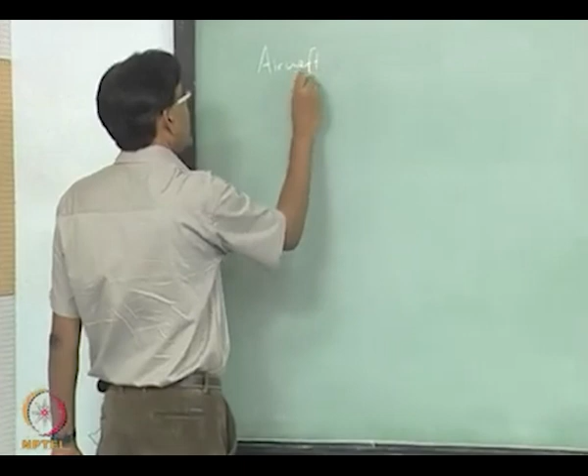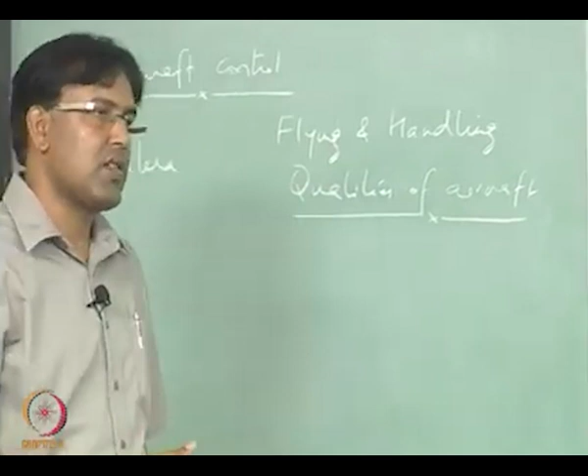Okay, if you remember in the last few classes we talked about flying and handling qualities of aircraft. And these qualities were based upon which class of aircraft, which category of flight, and the levels, and all of them were related to where the eigenvalues of the aircraft dynamic modes are located in the complex plane.

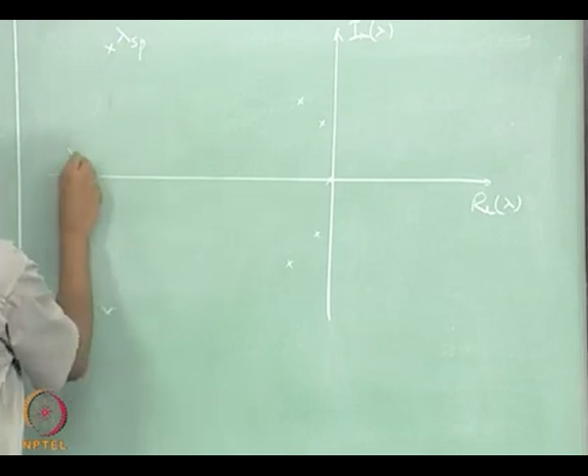So, this is how typically we saw the eigenvalues of aircraft located in the complex plane, right. So, clearly the real eigenvalues are giving the time constants, and the complex conjugate eigenvalues are giving us the damping

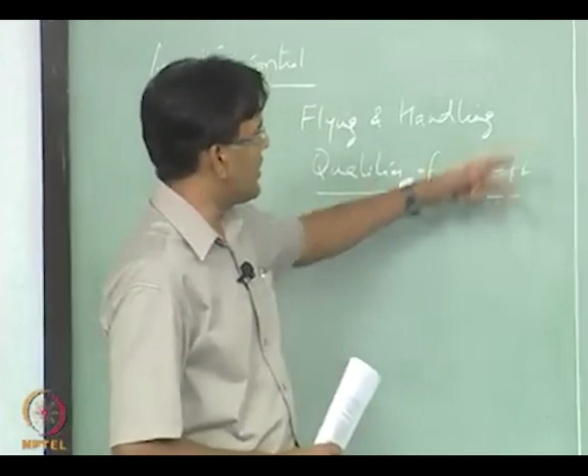and the frequency characteristics. Now, the question is let us say our basic aircraft design results in giving us in one of the flying conditions, not all, but let us say it results in giving us the eigenvalues at these places located in the complex plane, right.

And let us also assume that these are not what is required according to the flying and handling qualities. So, remember we said that flying and handling qualities will depend upon these parameters associated with the location of the eigenvalues of the aircraft in the complex plane.

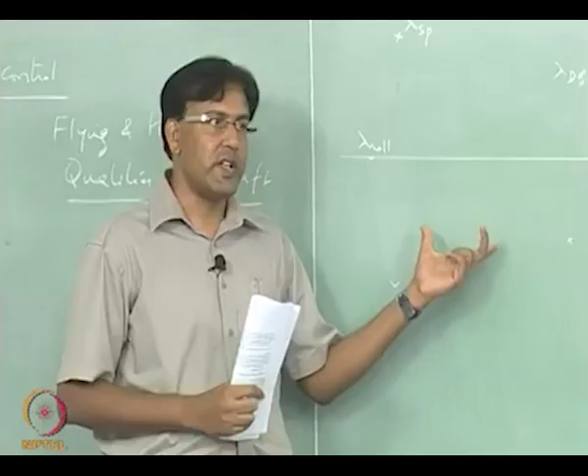So, if there is no matching of what is required and what we have achieved by the design, then either we can find out the aircraft design parameter which can be changed so that we get the location of the eigenvalues in the complex plane as required by the flying and handling qualities, or we do something else, and that something else is related to the subject of aircraft control.

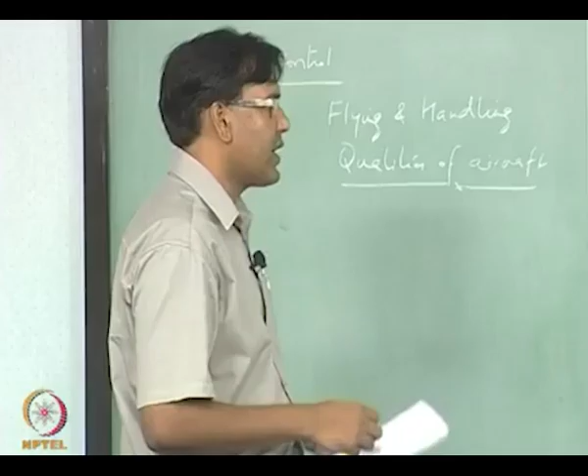So, what we are looking for is we are looking for artificially changing the dynamic response of aircraft small perturbation motion, and also when we are trying to execute maneuvers, there also we want the aircraft to follow certain desired dynamic behavior, which can be achieved by the aircraft control systems.

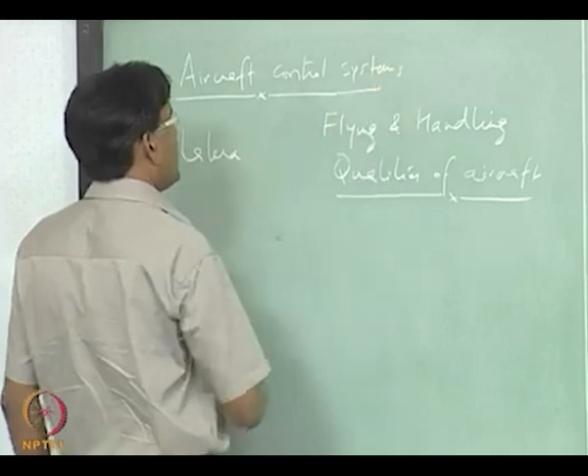Typically, the task of aircraft control system will fall in three different categories.

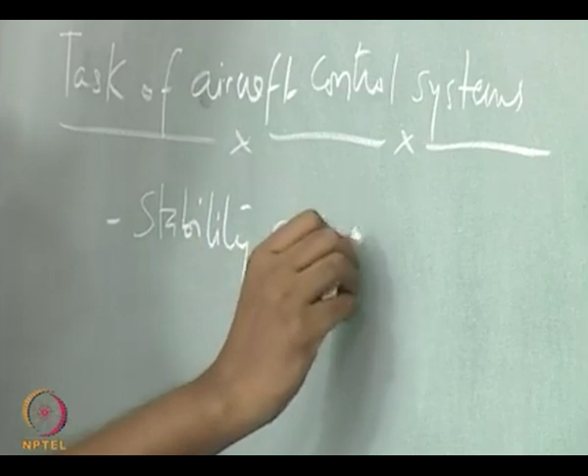One is stability augmentation. So, control system which results in providing artificial stability to the aircraft are known as stability augmentation systems, and in short form it is also written as SAS.

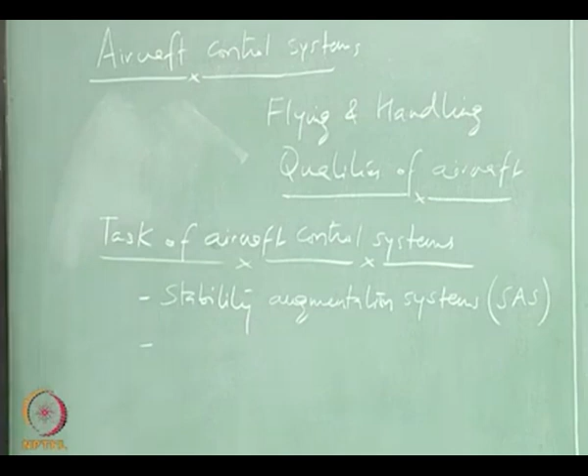The other type of control task is to augment the control system itself, and those control systems are called control augmentation systems.

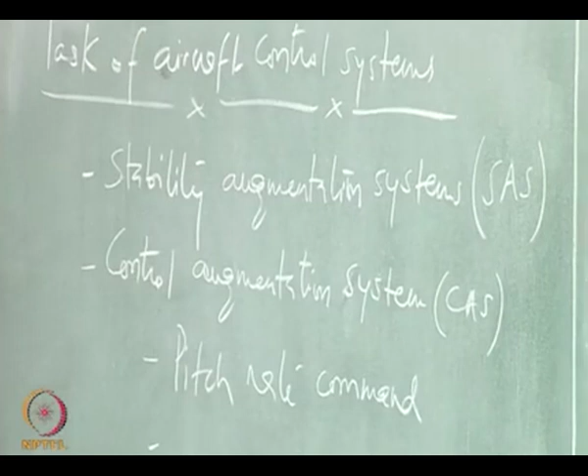So, task of this control system can be, for example, commanding the pitch rate or commanding the, for example, the acceleration.

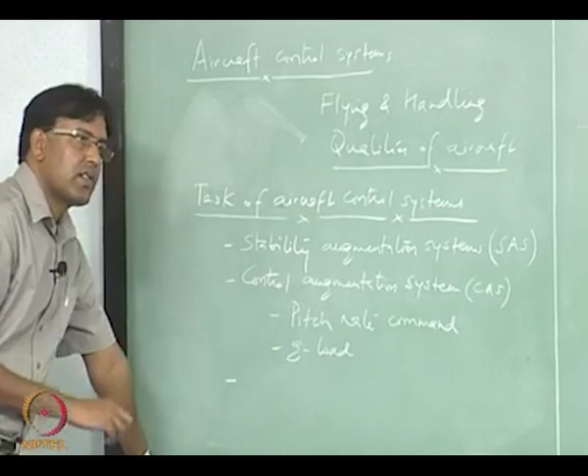There are other class of control systems which are designed for pilot free flight, wherein pilot does not have to do any work, he just fixes some number or attitude of the aircraft and he can leave his hands off the control surface as a sticks, and automatic control systems take care of the desired dynamic behavior of aircraft. So, in this category we have control systems.

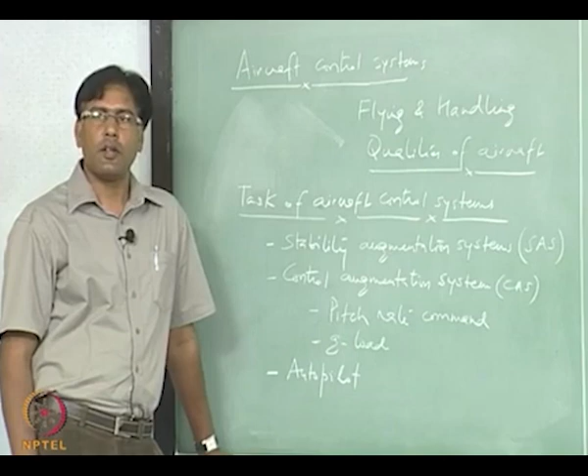Autopilot control systems are those control systems where pilot can fix the desired attitude and the path for the aircraft and leaves his hands off, and the control system takes care of the aircraft.

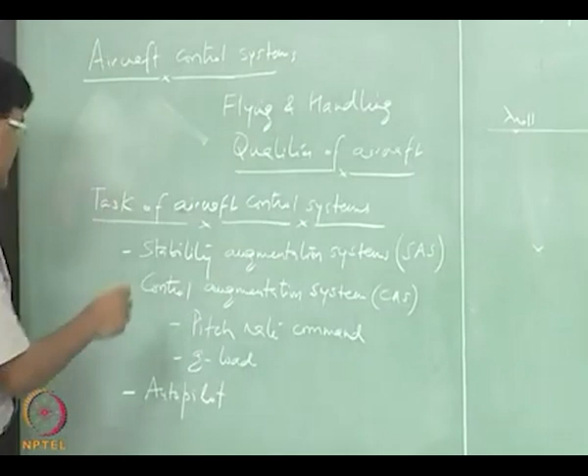So, in this class we will first look at the stability augmentation system.

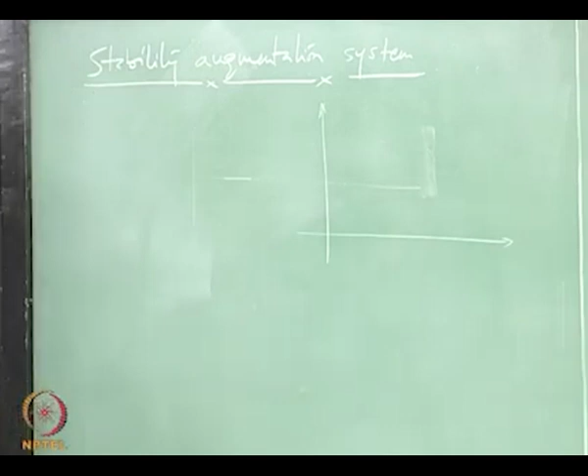So, as the name suggests, this particular type of control systems is for augmenting the stability of aircraft. So, what essentially it does is it helps in locating the eigenvalues suitably using a feedback mechanism.

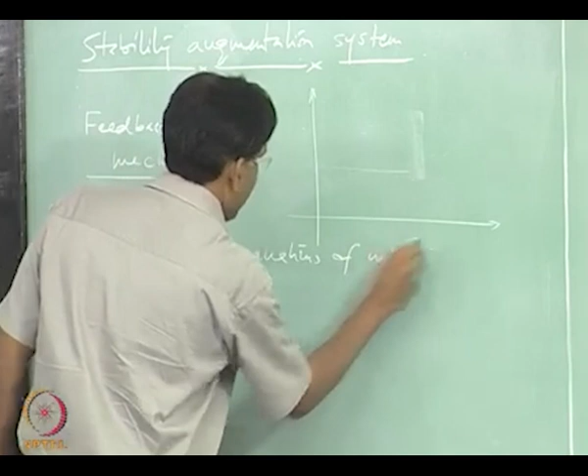So, let us go back to our equations of motion, where we had the complete aircraft equations of motion written in compact form as

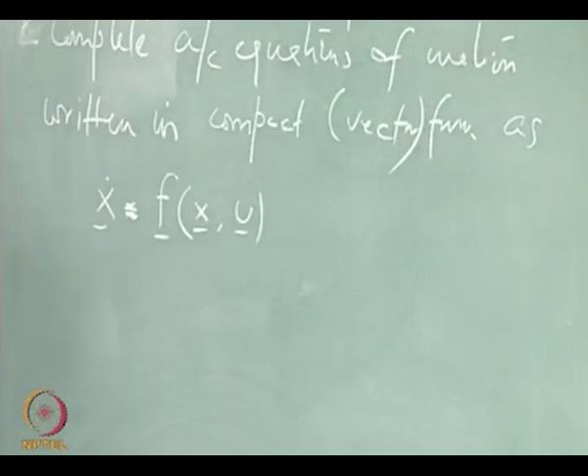linear control systems are actually designed around particular equilibrium flying conditions, and those flying conditions are obtained by setting this derivative of the aircraft state variables to 0. And so, we have equilibrium conditions which are denoted by x star, u star. The linear model around the equilibrium point is developed using small perturbation theory, and what it gives is

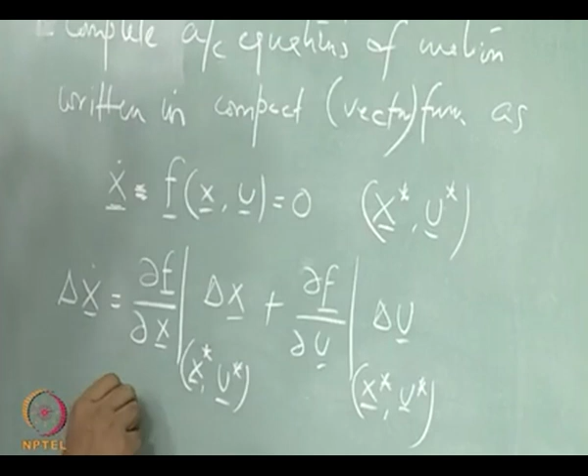now, this matrix is a matrix of constant numbers at this equilibrium flying condition, and that we called as system matrix A, and this matrix is also evaluated at this equilibrium point and is called the control matrix. So, A is system matrix and B is control matrix. So, we have our linear aircraft models around equilibrium point.

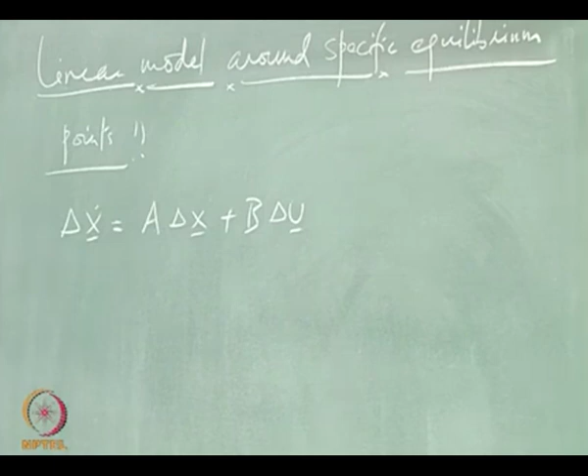Aircraft response in perturbed variables are governed by the eigenvalues of the matrix A, which we obtain by solving this equation of characteristics, and these eigenvalues are located in some fashion in the complex plane.

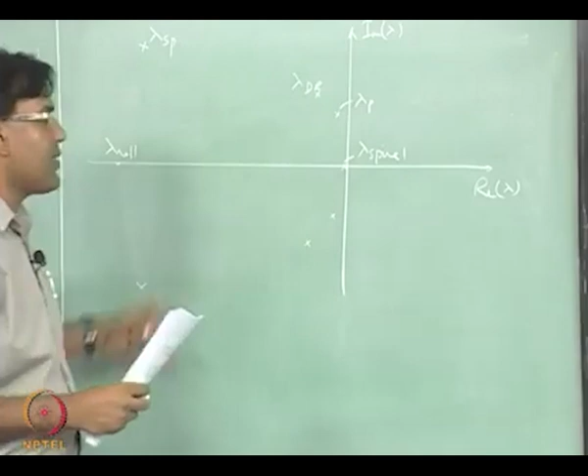What we essentially want is, we want to move these eigenvalues in the complex plane, so that we can finally achieve what is desired for the aircraft by the flying and handling qualities in terms of time constant or the damping ratio and frequency characteristics. And that of course has to be done through this delta u.

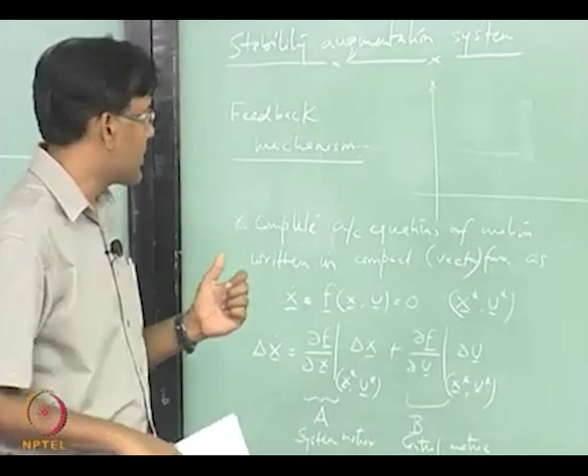So, there is one case when this delta u is 0. So, aircraft is at some equilibrium condition, is flying, and whenever small disturbance is hitting the aircraft it is showing some response, okay, and that can be stable yet not so desired. So, zeta and omega n, for example, may not be what we want.

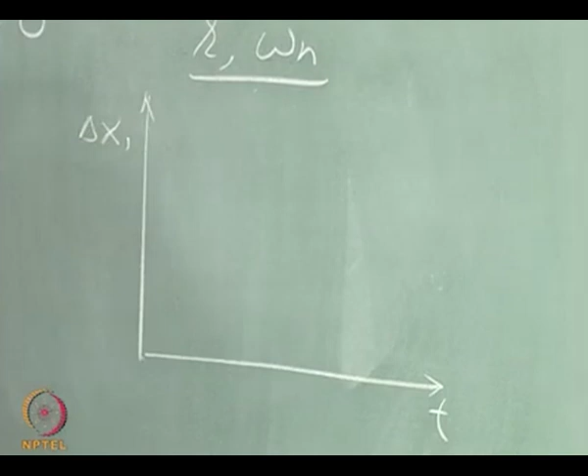So, one of the responses, let us say in some variable x1 or the perturbed variable, is looking something like this. This is the natural response. What we are intending to do through the stability augmentation system is to modify this response.

As desired. There are many ways of doing that. Linear control theory or classical control theory is full of techniques which help you to define this delta u in some fashion, as for example this.

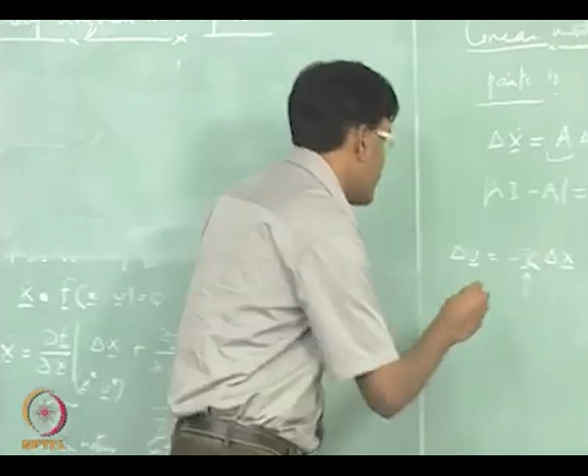So, here this delta u is modified according to the change in state variables, perturbed variable, using this constant k. This k is called gain, and it can be a matrix, because we want to control response of aircraft in different variables. So this matrix k is not just one gain, but a matrix of gains, or a vector of gains.

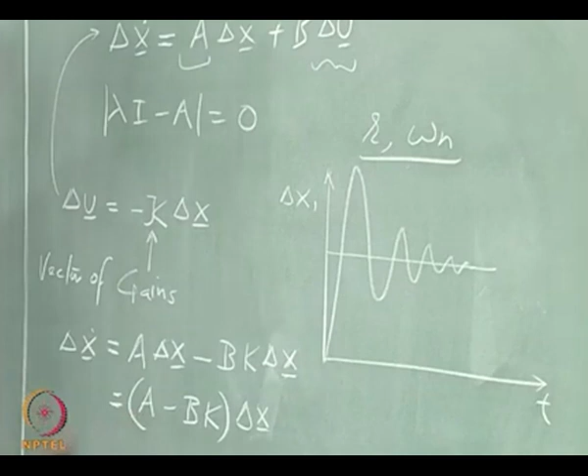Let us see what it does to this linear model. When we incorporate this delta u in the linear model, it changes the system matrix through the control input. So, the new system matrix, when we talk about including this law in the linear model, becomes A minus B into K.

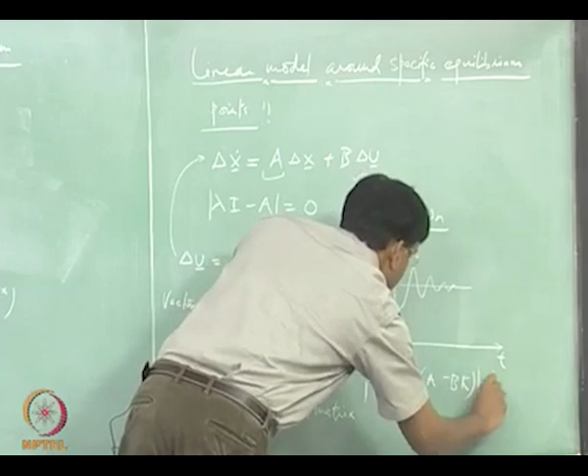And now, if we want to look at the behavior of aircraft, including this control system, then we have to solve the eigenvalues of this equation. So, clearly, inclusion of this matrix or vector of gains k modifies the eigenvalues, or when you change the gains, moves the eigenvalues to a location which is desired, and that value of the vector gains can be used to design the feedback control laws.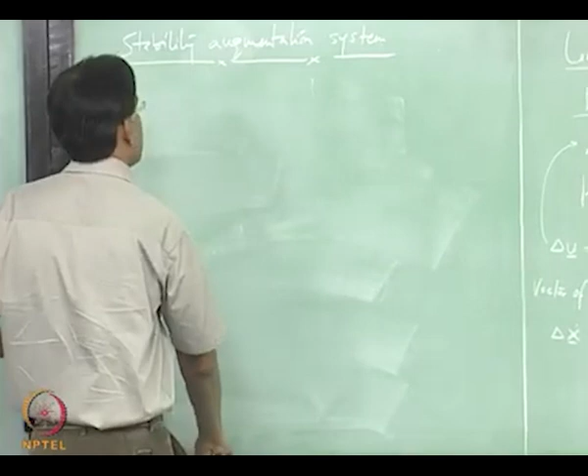Let us look at one example here. So, we talked about constrained yaw motion of aircraft in one of the lectures, about an equilibrium condition and the equation, linear equations for that particular case.

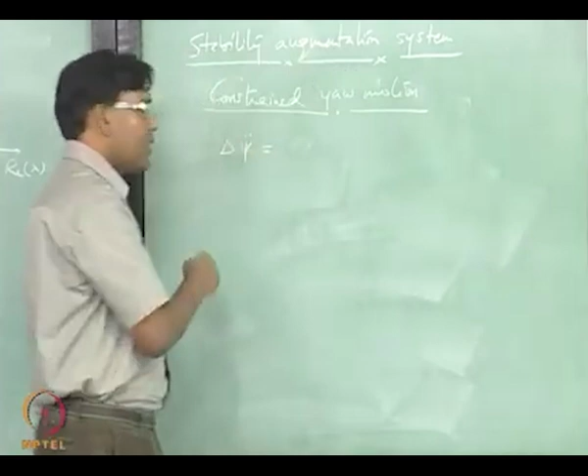So, aircraft had only one degree of freedom, that was in yaw, and the equation of motion in the perturbed variables around the equilibrium state turned out to be this.

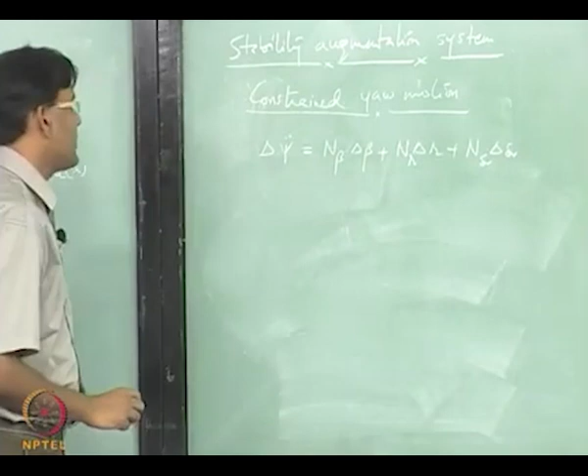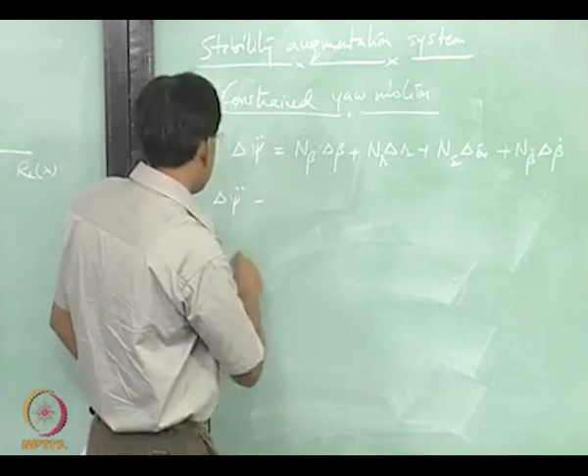What we could find from here was the natural response of the aircraft to disturbance, and that was by solving a quadratic equation corresponding to this equation.

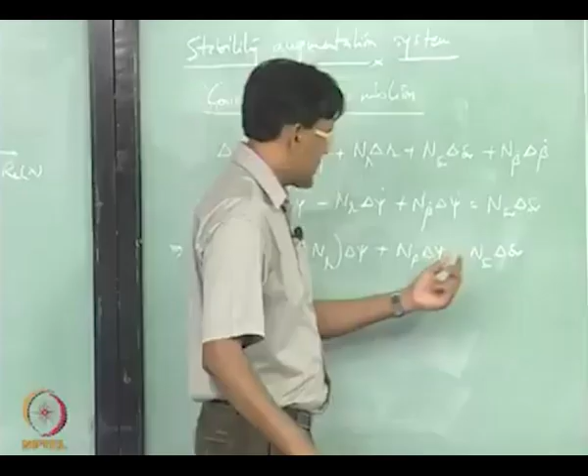Of course, if we do not change this delta delta r from the steady condition, then what we are looking at is the response, free response, and that is given by the solution of this set to 0, and then it becomes an eigenvalue problem.

So, the eigenvalue problem corresponding to this system when delta delta r is 0 will result in giving us the damping ratio and the frequency, which is square root of n beta, and the damping ratio is this.

What we want to do in this case is design a stability augmentation system which will enhance the damping of aircraft in yaw motion, and that will also have an effect on the frequency.

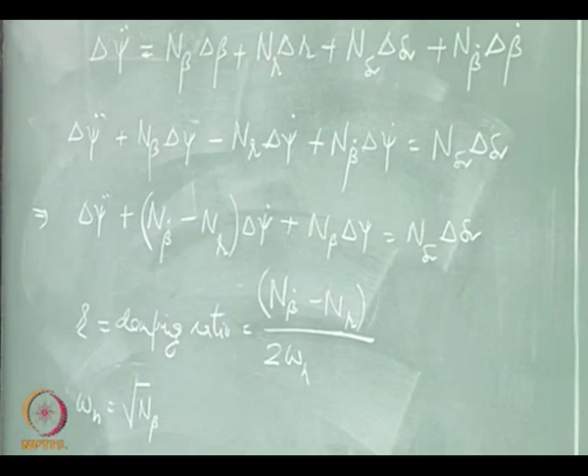Okay. So, let us see what happens if we change the rudder deflection around the fixed equilibrium condition. So this delta delta r now can be deflected around the trimmed condition according to the feedback.

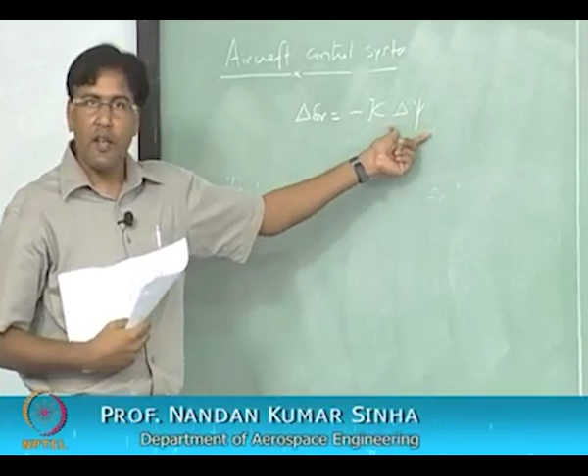So, what it does is read the delta psi from the equilibrium condition, multiply it by this factor k. So this factor k is actually sitting as controller. It reads this delta psi, multiplies it by this factor k, and deflects the rudder according to this formula.

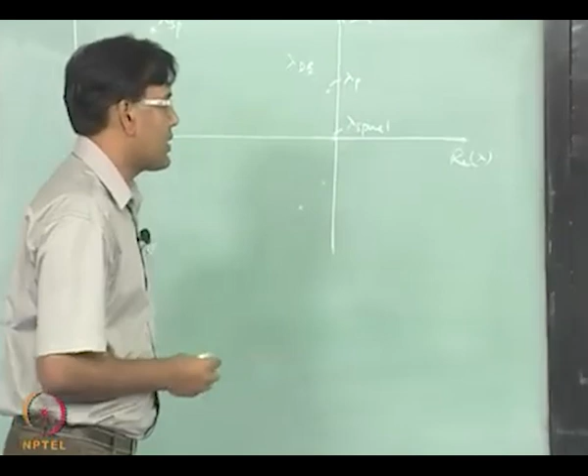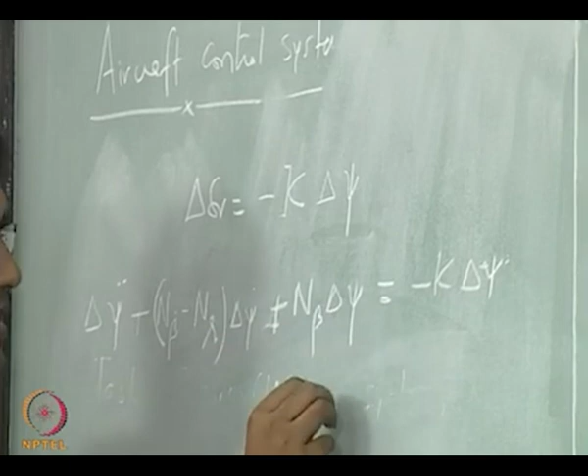So, what this does to the equation is, what we achieve by deflecting the rudder in such a fashion is changing the stiffness coefficient to n beta plus k into n delta r. So, what it's going to do is only change the frequency, the natural frequency of the response.

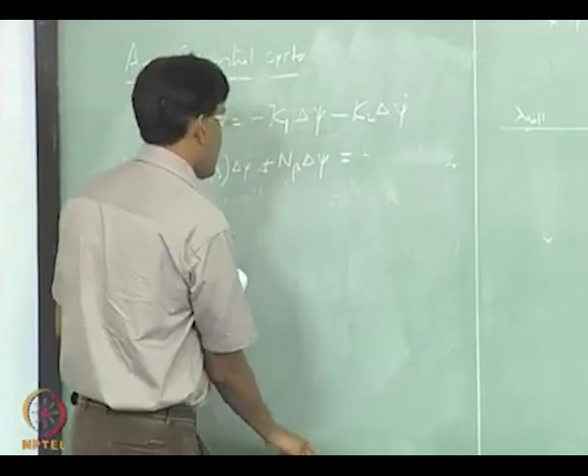In case we also want to change the damping ratio, what we can do is through this feedback mechanism. If we not only read the change in the yaw angle from the reference condition, but also modify our delta r based on the rates, then we can achieve a change in not only the frequency characteristics, but also the damping characteristic. So, this is how it happens.

So, let us look at how changing the frequency and damping both together works.

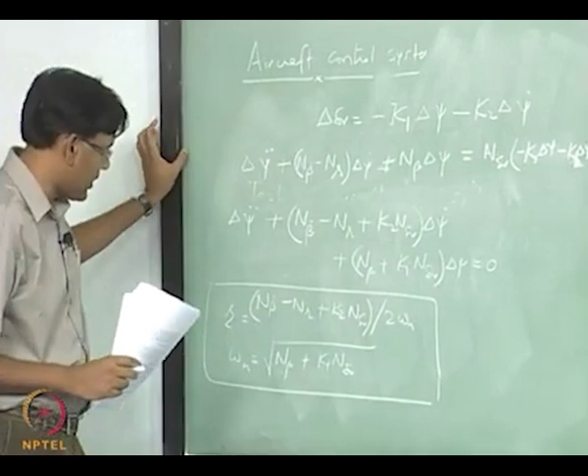So, now the new damping ratio, the expression for new damping ratio and the frequency are these. So clearly, deflecting the rudder around the equilibrium point, or around the equilibrium value of delta r corresponding to that particular trimmed condition, if we deflect the rudder in this fashion, then we can modify the damping ratio and the frequency characteristic and the location of the eigenvalues in the complex plane, and that is done through these two gains K1 and K2, which can be adjusted.

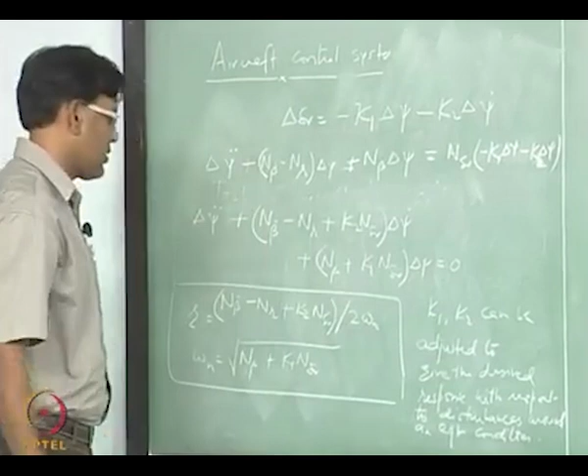So, K1 and K2 can be adjusted to give the desired response with respect to the disturbances from the equilibrium condition.

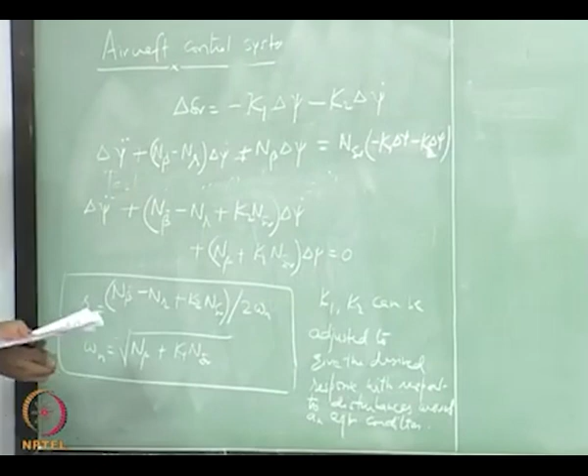Okay, so let us look at another example. This is how typically a yaw damper will work. Let us say we want to modify the short period response of aircraft using a stability augmentation system.

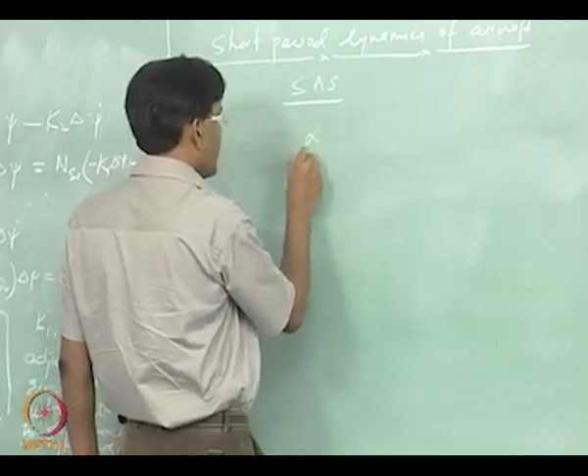So, what we have is some response which is given by alpha over delta E. So, for input in elevator, aircraft is giving some response in angle of attack, and we want to modify this response using stability augmentation system.

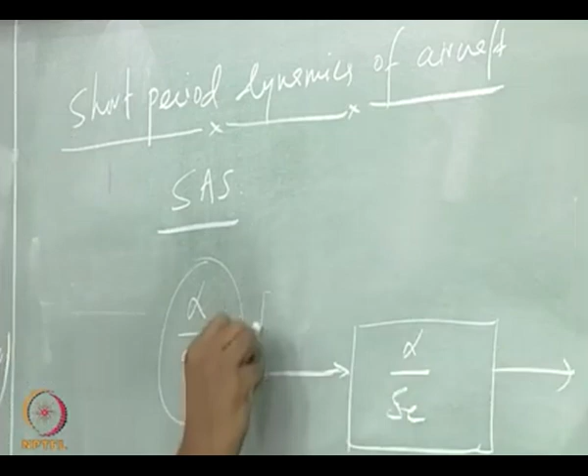So, in general, if you have an open loop and the pilot is using the stick which is giving the deflection elevator, the response is angle of attack which is governed by this ratio, which is called also system dynamics, or alpha dynamics in this case.

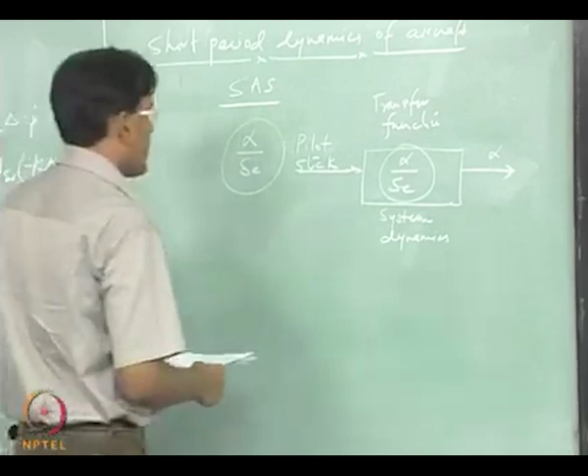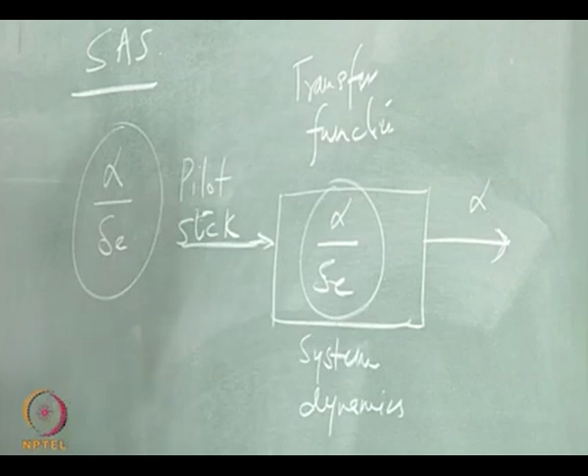So, pilot is giving a stick command and there is some response in angle of attack, and that response will depend upon the aircraft parameters. What is to be achieved by stability augmentation system is artificially changing the dynamic response of aircraft around the normal condition. So, this is an open loop model.

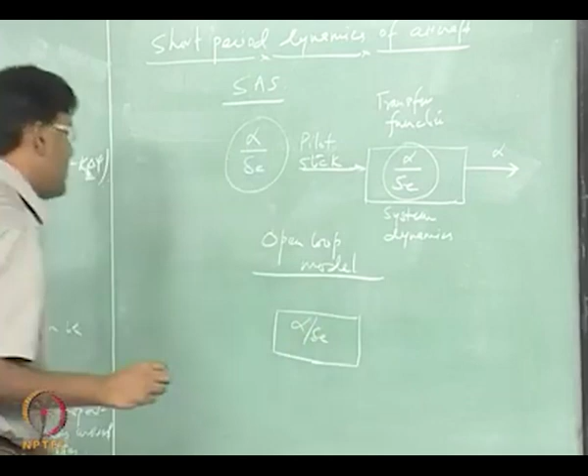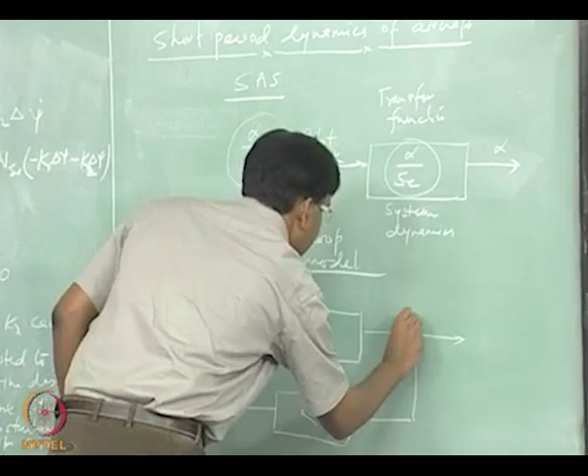Now, if you want to see how a stability augmentation system will work, which is a feedback system, this is delta E, which is given by the pilot, and because of this feedback loop, the stability augmentation system results in changing this pilot input by this amount.

So, what delta E we see is now delta E, which is sum of delta E coming through the stability augmentation system and the pilot input, and in this case this delta E SAS is k into alpha.

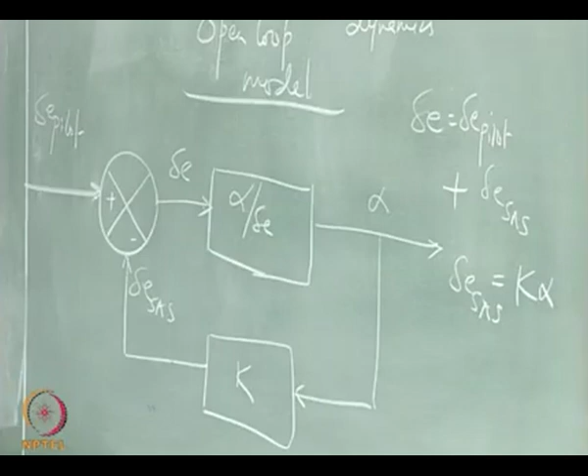Okay, let us look at what is happening here. So, we have the equations for the pitch rate dynamics, which is given by this. So, this is again a constrained situation.

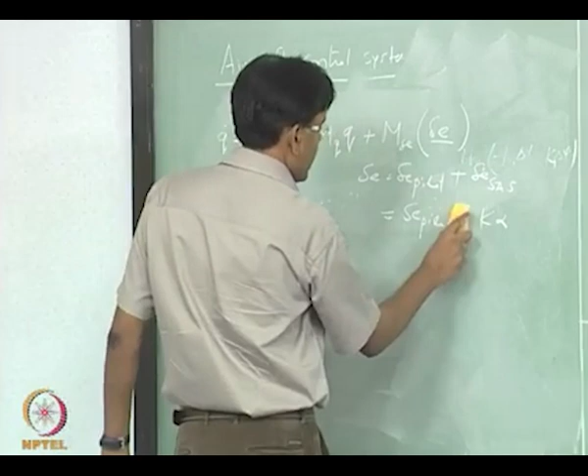So, now because of this stability augmentation system in place, this quantity which is representing the frequency of the short period motion is automatically modified, and so therefore, it has an effect upon the dynamic response and the stability characteristic of the aircraft in short period motion.

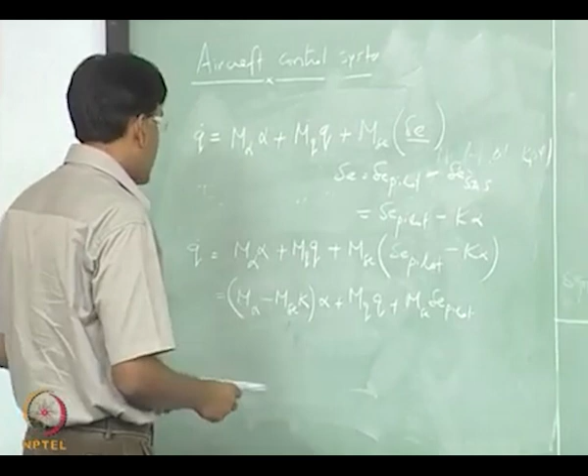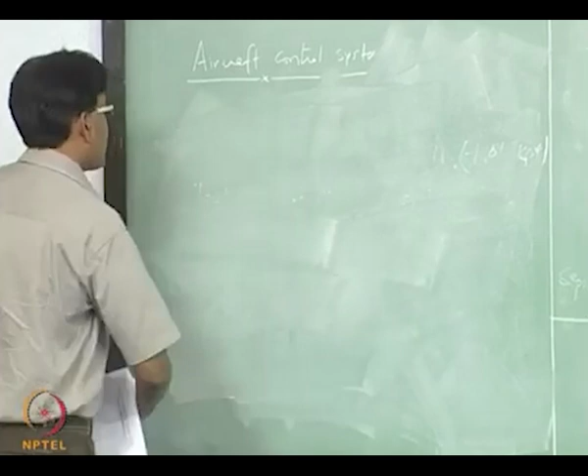In general, a typical stability augmentation system will not look so simple, but it will be involving a lot of other elements. So, to give you a very brief introduction to the technique used to design stability augmentation system, we use one of the techniques called Laplace transform technique, which is applicable for linear system models as shown there.

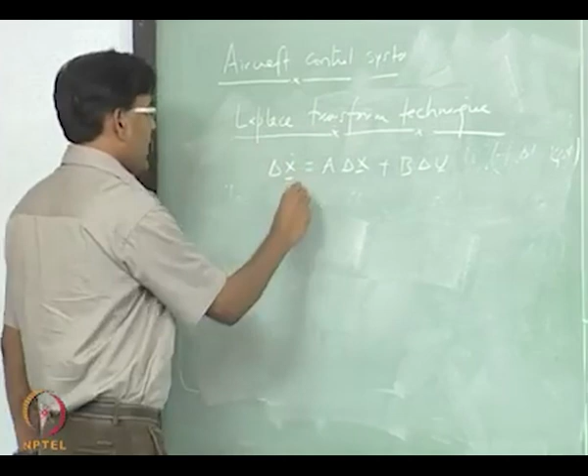So clearly if we want to transform these equations into algebraic form, we can use Laplace transform technique, and it results in giving us the relation between the input and output, which is in this case...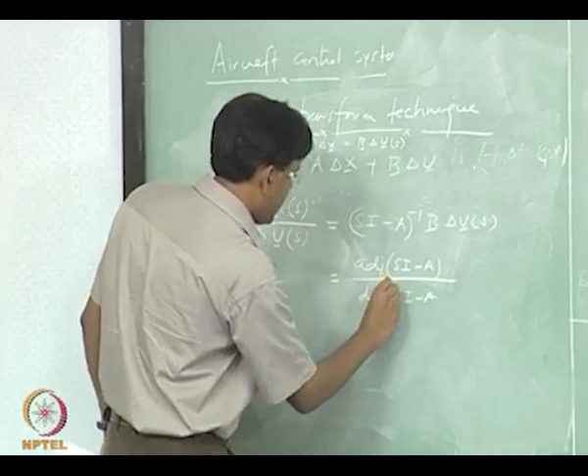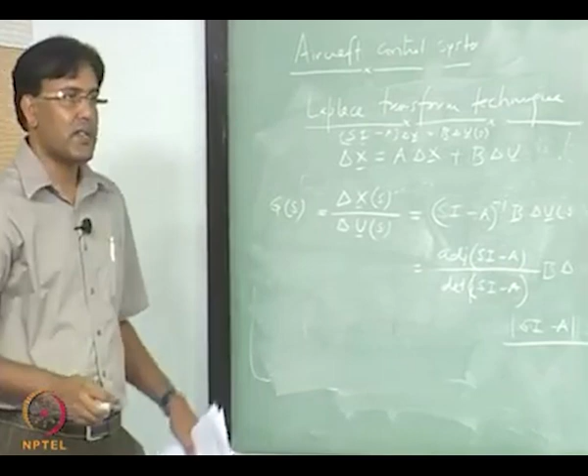We know that the open loop response is governed by the solution of determinant of S times I minus A equal to 0, and this function which relates the input and the output is called the transfer function. So, this alpha over delta E in this case is the transfer function for the open loop model, and the response is governed by the solution of this in S.

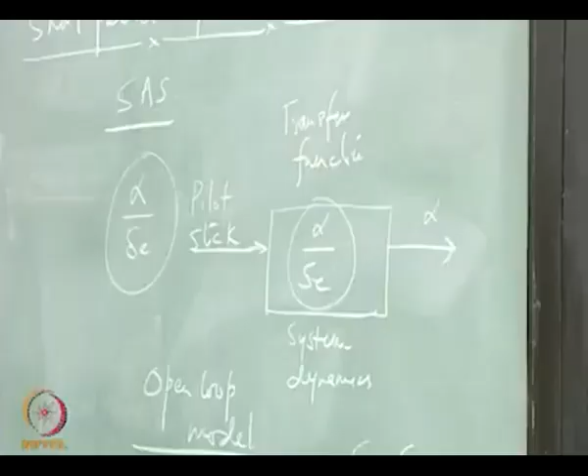S is also similar to eigenvalues, here called characteristic values. Now, let us see what happens when we close the loop.

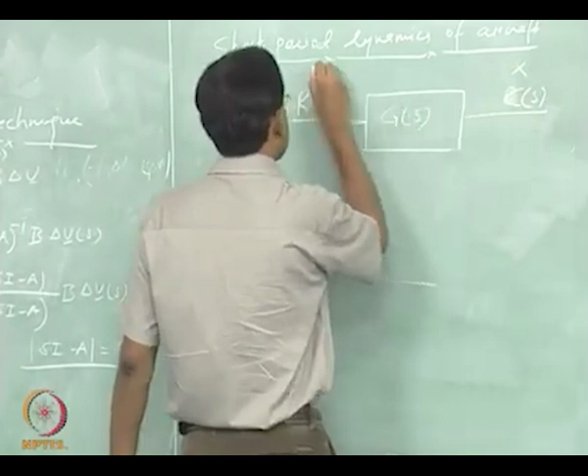So, GS is the open loop transfer function, and the response corresponding to this input Rs is some output. So, in our case is X and U. Now, the usual notation is to use C(s) and R(s) for the output and input respectively.

So, what happens when we close the loop is it changes the input characteristics depending upon the error that is fed back through a feedback element.

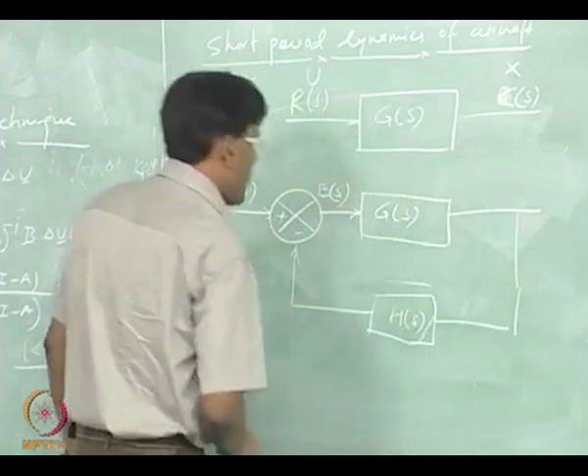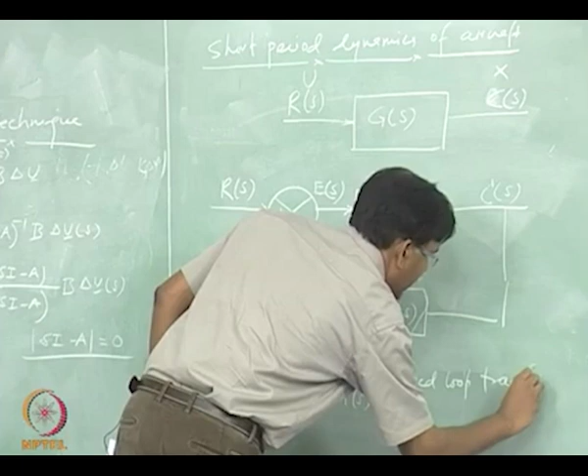New input output relation with this feedback system in place is this, and this is closed loop transfer function. When this happens, clearly the denominator here is modified, and the solution of this is what governs the dynamics.

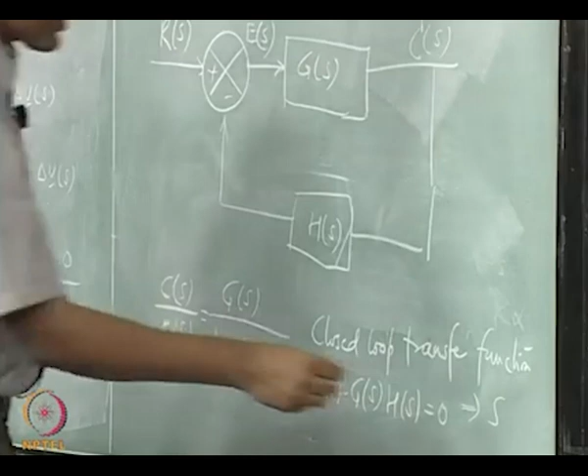So, now if we want to look at the behavior, that will be governed by the solution of this equation, which is the characteristic equation, and the solution of which is S, and S is also nothing but the poles or the eigenvalues of the closed loop system.